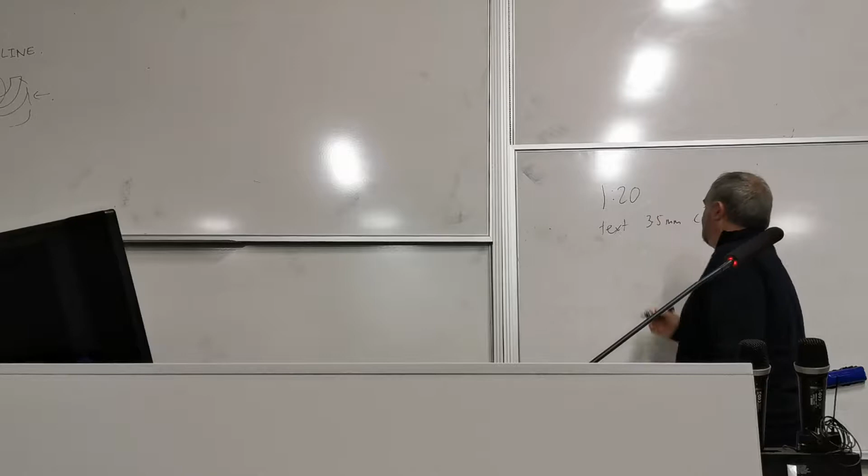The text is still going to be 3.5 millimetres in layout. Can anyone tell me what it's going to be in model? 1.75? No. Is it 0.35? 0.1? 0.07? No. 0.0035? There's actually half a mark coming up here if someone could get it, before the lecture's over would be nice. 0.17? Well done, mate, you've got yourself half a mark.

It's millimetre drawings from now on. Okay, so to do that, we go 3.5 times 20, which equals... did you say 7? 10? Sorry, I have to take that away from you. Which equals 70, alright? That's how simple it is with millimetre drawings.

Is it for both of the assignments? Just assignment 3? Yeah, so for assignment 3, it's millimetres.

So cast your mind back to either me or Ingrid: with millimetre drawings, everything's drawn in millimetres. So when its layout space is asked for 3.5 millimetres, and the scale is 20, that's what you draw it as. Okay?

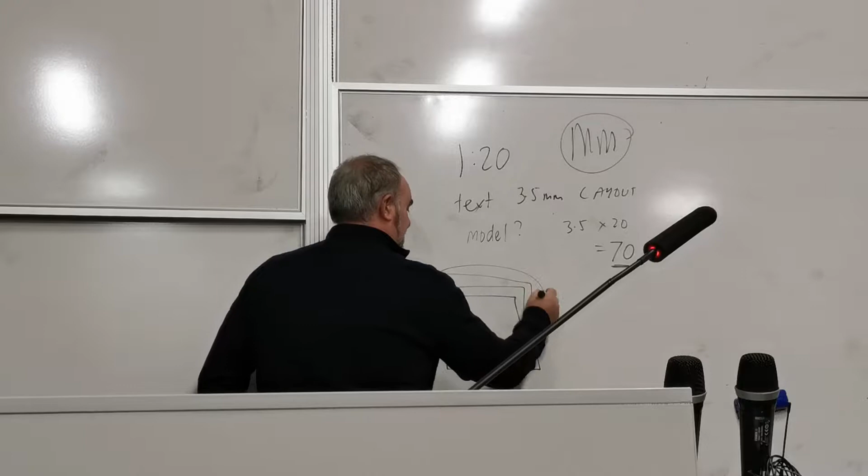They went, 'hey bro, what are we offset by?' And someone said, 'oh, it's 0.2, okay cool.' Then what about this side? 'Oh, that's 0.4, okay thanks.' And they joined up and found the butterfly wing, drew it in there, and thought, 'oh, that's going to be a pretty easy 7 marks from Roger.' No, it's going to be a very easy 1 mark from Roger.

Did you label the wings: toe of fill, top of cut? Did you put the batter symbols in the correct place? If you use batter symbols, do you still need to label it with words? No, that's fine. Did you label the cut area and the fill area?

Did you put the flags in for the A and B sections? Did you not put the flags through the platform, like Ingrid showed you not to do through anything? Did you put the line of equal cut and fill and label it, and put it in a line type that was different to all your other ones? Did you take your survey pegs off and your survey data off the proposed plan? And did you put a line on the proposed plan that was a lot thicker than the normal lines?

That is how you maximise your mark in my class, okay?

So taking that forward into assignment 3, the more students that ask questions, the more they get answers, the more they get feedback that ends up in real marks, okay? With assignment 3 there's quite a few bonuses to be had. And sorry about taking that bonus away, it's just that you and I both are no good at maths, so, you know...

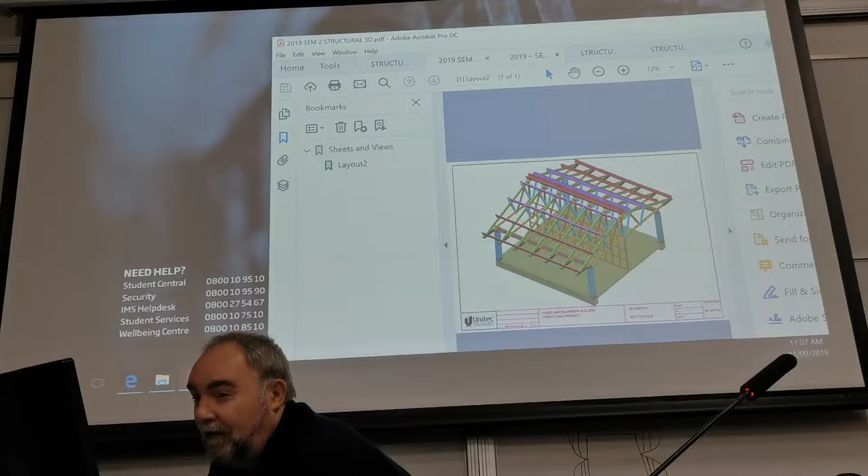Okay, what if I was to do this? Is that coming through at all? Oh, yeah, yeah. Alpha Mark. To me? Yeah. The problem I've got is that's off my screen, and I can't see it on here now. Oh, so I know.

Display settings to detect. Extend these. Right, I can now. So that's what you guys are seeing? Everything's going.

Okay, it's going to be an interesting session, I've got an idea. Luckily, I'm an engineer and know how to think laterally on things rather than, no, it didn't work, try again.

Is that coming onto the screen? No, no, yeah. It's not lucky. Show on only two, extend these displays, duplicate these displays, keep changes. Is that it? Yeah, yeah. Always do. It's crying a little bit.

Your task is using A1 ISO full bleed in tab 1 to produce a foundation slab reinforcing. So you're not having to initially draw the whole of the building up. All you'll be required to do is a drawing of the foundation slab. Now the foundation slab has got an elevation that looks like that, so in plan view it's going to look like that. Looking down on it, you're going to see those two corners with a dashed line.

Basic technical literacy, you would have learned that. I don't want to see this, I just want to see that. And I'm not going to give you 5 marks just by drawing a box with some dashed lines. So obviously you're going to have to put reinforcing in there and call it up.

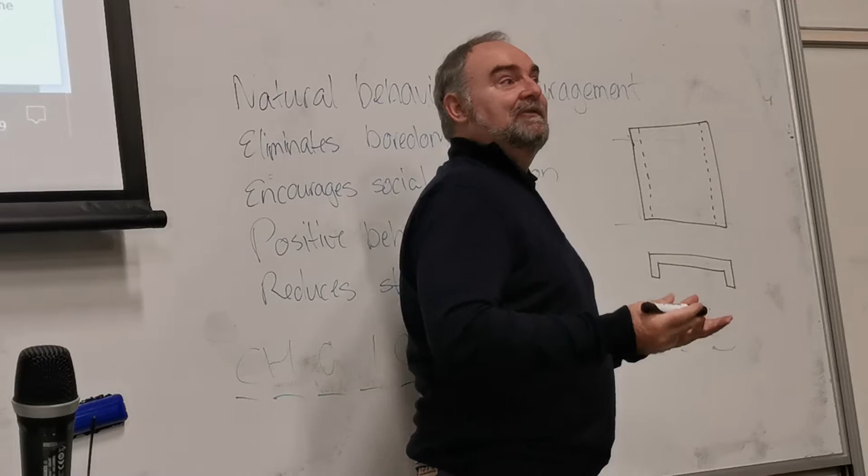The bad news is you'll be doing a reinforcing schedule, which is telling me exactly how long each bar is, how it's bent, what the dimensions, what the weight is. And if you get the schedule wrong, you'll get your numbers wrong on here, so you're duplicating your problems. If you get the schedule right, you'll get this part right too. So it's one or the other.

So this is one part of the assignment, the slab, and it's kind of all you really need to draw in terms of lines and drawings. The next two parts are your bar schedule or reinforcing schedule and your layout tab. Tab two will have a table of concrete quantities, materials, and that sort of thing as well, which isn't too bad, but that's another 5 marks as well.

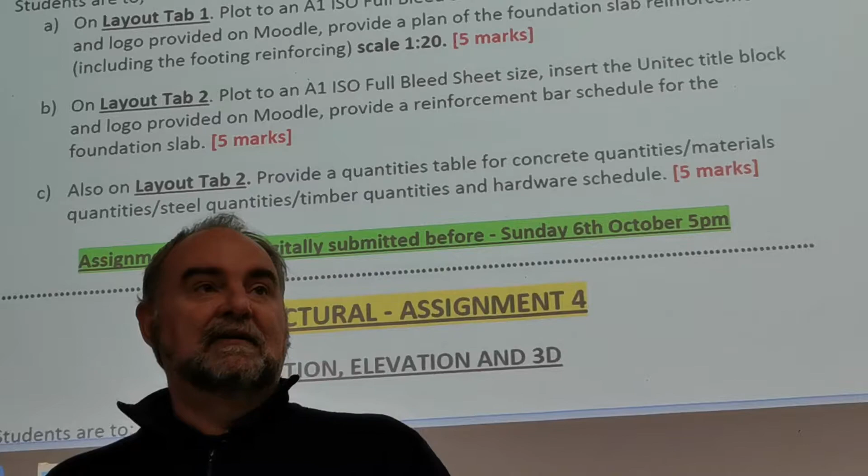In assignment 4, which is the second hand in, you can be beavering away drawing this at the same time. Students often ask me, do you want to see this elevation view when I'm drawing my slab? And the answer is no, take it right out of the viewport.

Do you want me to draw it? And I say to students, it's a very good idea to draw it because you're going to have to do it for assignment 4 anyway. So if you draw it down here away from the slab, you won't see it in the viewport, so I'll be happy. And you can start drawing your building up for assignment 4, and then when assignment 4 comes, you've already started drawing some of the drawing up. So you'll have the reinforcing bars and elevation view.

I'll be wondering exactly what I'm talking about. I am wondering myself, so I'll show you. So they're both related to each other, assignment 3 and 4? They are related, yes, that's exactly the way that I would say myself.

So I learned yesterday that if you click on that, you can maximise it, and I'm not sure how good that's come through, but I'll zoom in a little bit more so you can see. The quality is not too bad, you can read it, it's just a little bit hard on the big screen. Let me explain it.

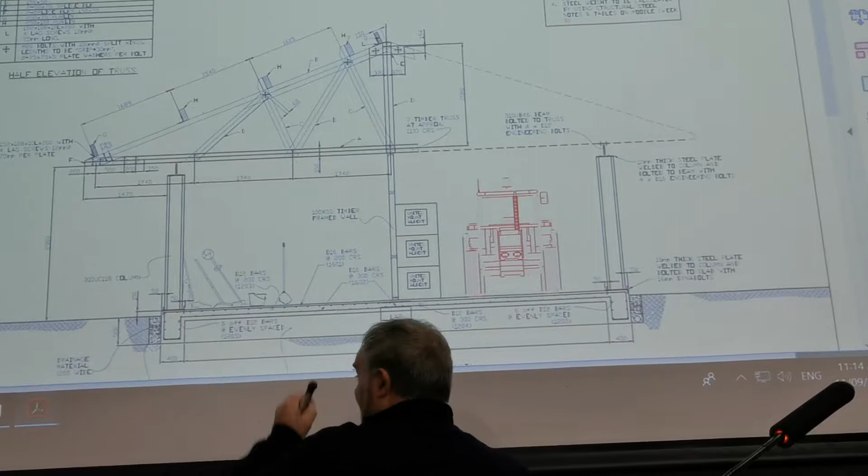You have a floor slab, much like I've drawn that one there. You've got a bit like your assignment in technical literacy, you've got some drainage here, and you've got a drain, an overflow drain, and some reinforcing bars in here. On that we then have some plates, then a column, more plates, a beam, and on top of that beam we place our trusses. The trusses are timber trusses, and there's 7 of them going basically into the wall.

In order to work out how you're going to represent these bars in plan view, it's not a bad idea to draw this up first. A lot of students do that. Last semester you did some reinforcing for Ingrid, and she told you and me that there is a minimum radius for bending a bar of reinforcing.

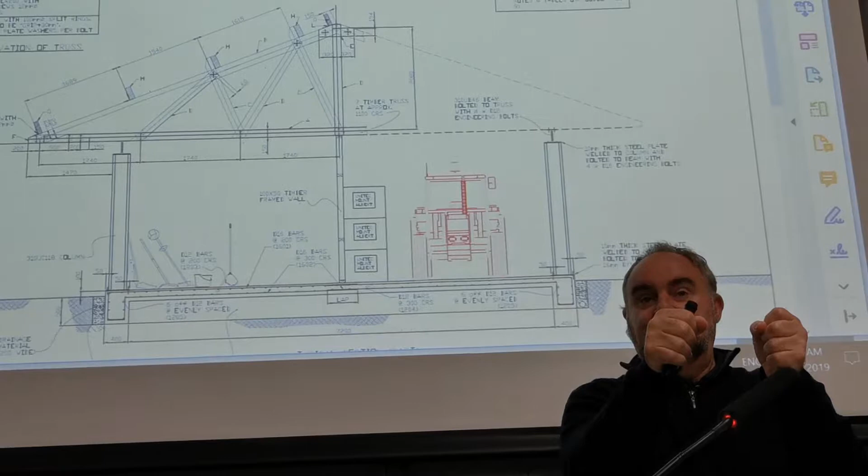And that minimum radius was - anyone remember what the formula was? You're close, but that's just a number. What if my reinforcing bar was 1 kilometre long? Would it still be 45? It's a formula. And the formula for finding the centre point of any bar is 2.5 times the diameter of that bar.

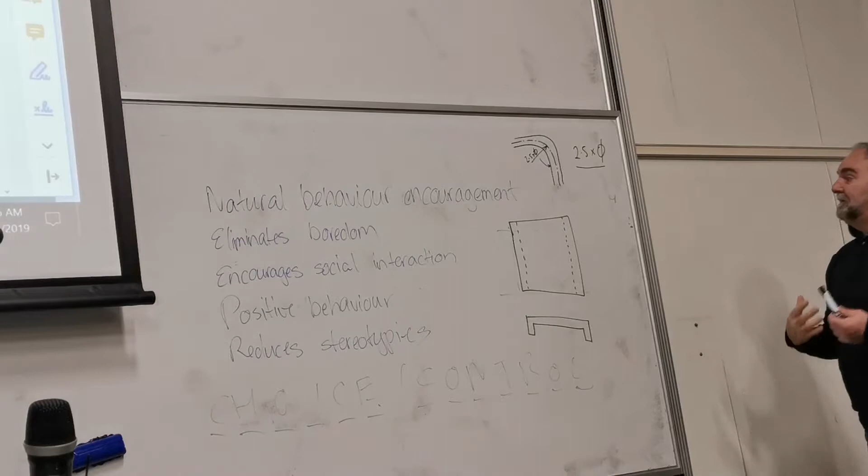So that radius there is equal to 2.5 times the diameter of this bar here. So in technical literacy we used a 16mm bar multiplied by 2.5 equals 40 millimetres to the centre of the bar. And remember, we did a P-line and then we filleted it with a fillet of 40 mils.

Similar things apply here. I expect you to draw that up with the right line thickness. The donuts will be the right size as well. Some of these bars are different sizes, we'll talk about that later. So if you draw this up first, I don't want to see it for assignment 3, but you can use it because for assignment 4 you're basically drawing that up. So at least you would have done the bottom part anyway, okay?

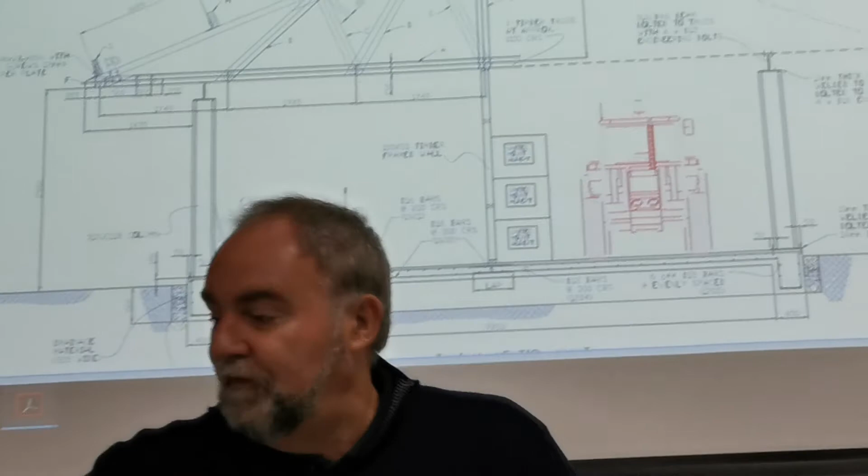Back to assignment 4. You're expected to draw up the 2 elevational views. That was one of them that you just saw. The other one looks very much like this - except I haven't given you anything there. You're going to have to draw that up yourself without my help. Whereas the other one, I've given you a little bit of help.

Now I don't want to see a dash line here, but for those that have noticed, AutoCAD's got a command called mirror, so you could probably get away with just drawing half of it up anyway and going to the other side. In fact, you could do half the slab down the bottom as well, if you wanted, if you were clever enough.

You don't have to draw the tractor, okay? The tractor is not part of it, that's just me being smart. You do not have to draw a tractor. And if you come from a farm somewhere in New Zealand, you are not going to get any extra marks for finding a 3D tractor and putting it inside the shed.

Do you trace that or just make it up out of your head? I'm not going to do it, I'm not going to do it. I just want to know - about 4 years ago, I found that online and I downloaded it. You don't need to know this, but it's made up of about 1 million different little dots, which is a very bad drawing. But it worked nicely for my assignment, so I threw it in.

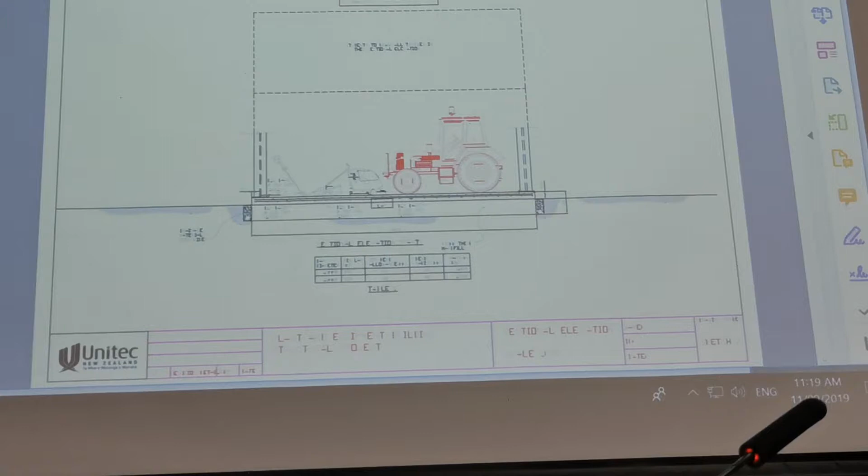All right, I've also got a Russian jet that I'm selling. If you want that online, it's stupid, and a monkey as well. I have actually got that, I'll bring them one. You don't have to show the equipment here either guys, it's just me trying to pad out the assignment, make it look like I do some work at home.

But the good thing about doing it this way around is it does show you the sideways view and the front view, right? So it gives you an idea that we are looking that way and looking that way. So when it comes to the assignment and the 3D aspect - I think that's the 3D. No, that's the reinforcing schedule. Try that one. Yep.

You'll see how things fit together, and you can see how these members go, one on the front and one on the back, etc., all the way along. Now, in 3D, what I'll do for you in week 10 is we'll draw up the slab, and I'll allow you to film it while I'm doing it. We'll do the plate, we'll do the column, we'll do the beam, I'll flip it round and put it on top.

I'll show you a couple of tricks because I don't like doing things more than I have to. I'll do one of these, go copy, copy, copy, do one beam, and flick it on the other side.

If we've got time, I'll show you the way I'd draw the truss up. It looks complicated, but you have to draw that anyway for assignment 4. You go around it in the P line and extrude the P line. If it's behind, extrude it that way; if it's in front, extrude it that way. Then you basically stand it up, put it on top, and copy it 7 times.

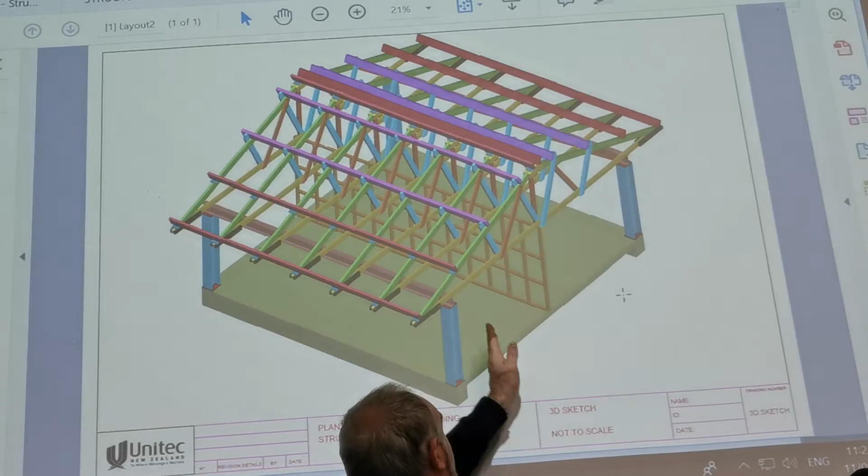The purlins are the same. You'll have to draw that little bit of the end of the purlin, and you'll know how much to extrude it, the length. You just extrude it once and copy, copy, copy, copy it into the correct position, so when you stand it up, the purlin will be stood up at the same time. It's pretty cool, I'll show you all that.

Because I've shown you all that, I'll give you 3 marks out of 5 for drawing it. The other 2 marks, you'll get a choice. The type of things I'll be asking you to do is draw the welds in, draw the bolts in, draw the angles in, draw the holes or the bolts and the angles.

This framing is part of the extra bit. If you want to go further, also external sheathing and roofing, and if you're really after an extra bonus mark, you'll have to get your civil contours and put them onto the drawing to show me the civil design around it—the bank and batter slopes and all that sort of thing, in 3D.

I'm very aware that a lot of you are going to have a materials test at some stage, along with other tests and assignments to get in, and an exam at this time of year as well. So my warning is to try and just stick to the 5 marks. The bonus 1 mark will take you a lot of time to get to, but it's there if you want it.

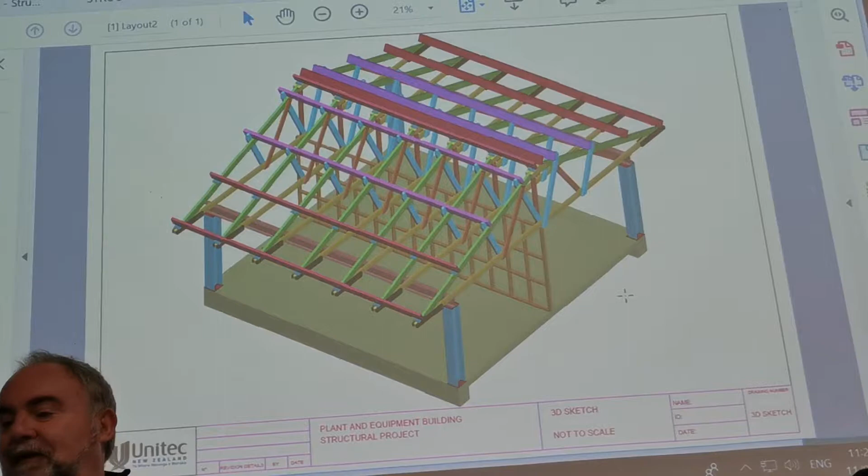So the assignment dates are set out here. Believe me, they're a lot softer than the degree. The degree's first hand-in for exactly the same project is midway through, end of this month for the first one, so the 20-something, and early to mid-October for the second one. They're also in the process of writing a 1,500-word design report at the moment. So maybe it was a good idea to tick the box that said diploma when you were doing your studies here.

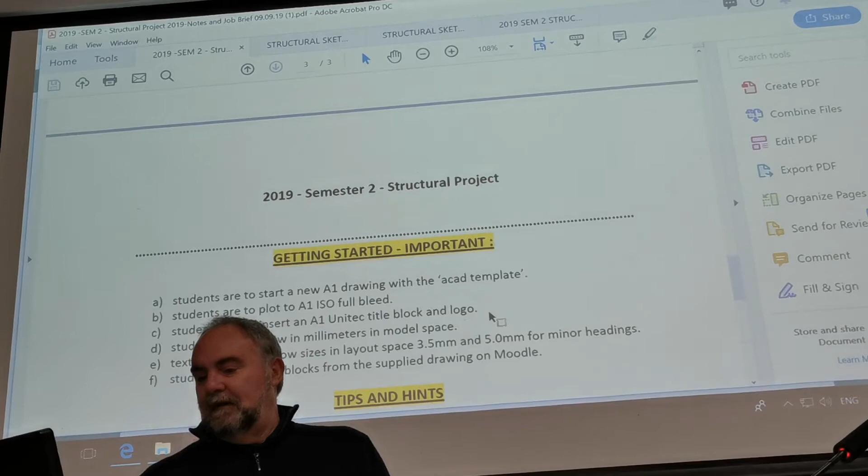So those are the dates, that's what we're heading towards, and there are a few tips there as well. If you want to get started, the best thing is to start setting up your title blocks. There's one that I've put into that set there as well, so you could start your title block and start drawing up this.

More importantly, you should start on the reinforcing schedule, which is why today's lab is really important to attend, and also Thursday's lab, because I'll be going over that side of things.

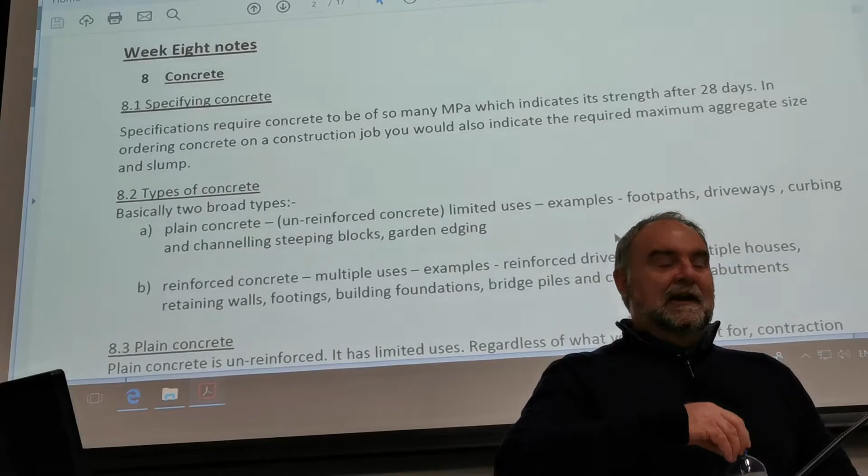So there is some overlap with other subjects. Now, a lot of you, not everybody, are what we call vanilla students here at Unitec, just going through doing exactly the chosen subjects each semester. Some of you fail things, some of you do five, some of you are here for 50,000 years. You're all doing different things, right? You think I'm a dinosaur.

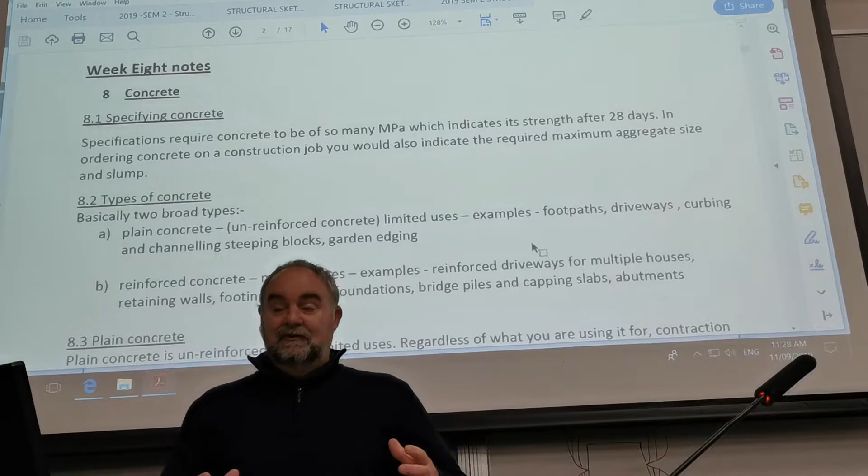You're all doing different things here at Unitec. So you'll find with my notes, like all the others, there's a little bit of overlap, particularly with materials, because you do concrete, steel and timber. But if you look at the materials notes, you'll notice Ingrid's notes are very intense, there's a lot to them. Good tip: don't miss her revision classes, because she tends to condense it down to a lot more of what you should be studying compared with all the notes. I'm not saying it's the answer to everything, but that's a good tip. Previously Roger Glanville, who taught before her, used to do the same thing.

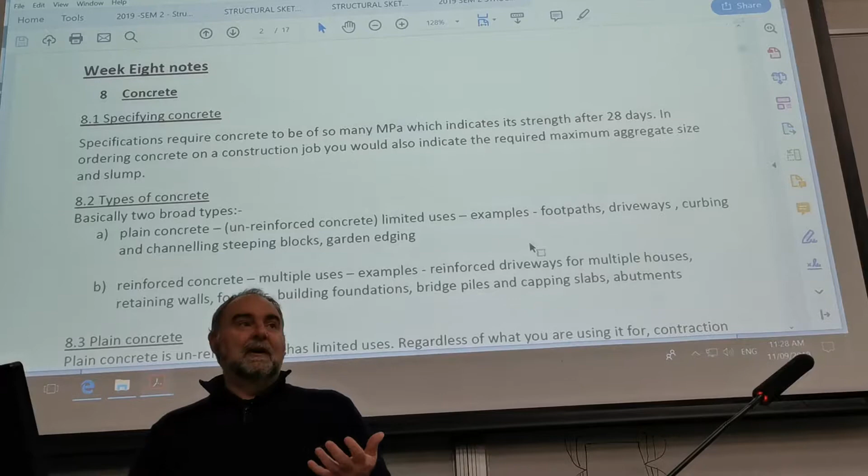As far as my notes go, I tend to concentrate more on explaining what something is and what I'd like to see on the drawings. For example, Ingrid might go into how concrete is manufactured, or how steel is manufactured, or the tanalization process of timber, going through the different stages, whereas I tend to say, okay, there's these types of timbers, you've got to choose one and put it on the drawings, and this is how you should write it. So it's a little bit different. You may not see that subtle difference, but I do like to give you theory that I can test you on as well.

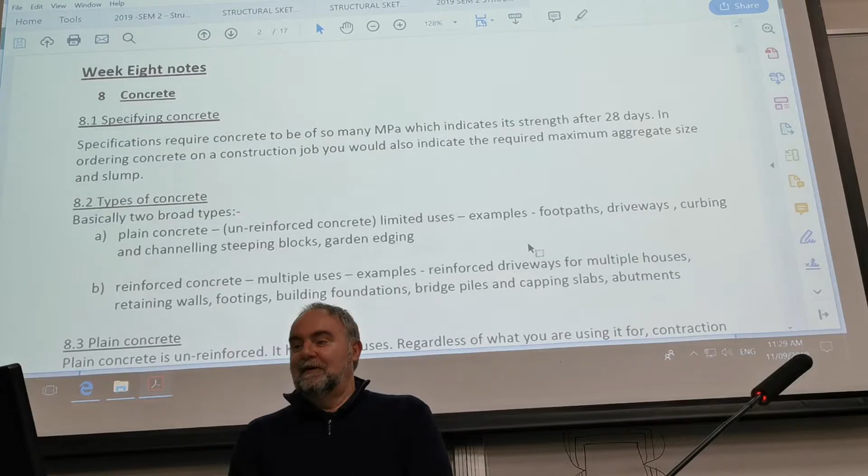With concrete, the MPa value is a pretty important factor in terms of the strength of the concrete after 28 days. What's not written in my notes is that that's one of the questions. Also not written: 20 MPa concrete is okay for an ordinary foundation slab for a house or something like that. But for this building, as you saw, and as Mr. Mitchell picked up, there's a tractor in this building, and that's fairly heavy, so it would be a good idea to put a reasonably good grade of concrete in there. So let's call it 25 MPa concrete, and let's make that one of our notes. It's not uncommon to say the concrete should be 25 MPa after 28 days as a standard structural note on a drawing.

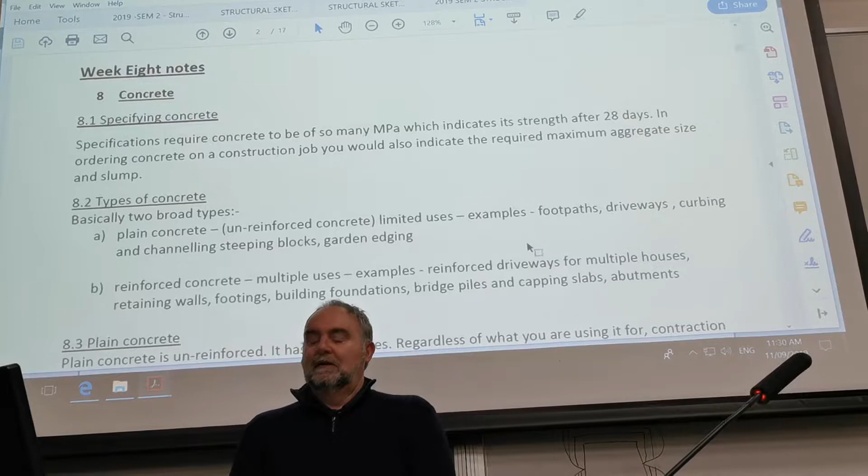By the way, when I say something and it doesn't appear on your drawing, and you start crying because you didn't get half a mark for your notes section - there's two types of concrete. There's plain concrete, which we are not using, but that can be found all over the place. It can be found on garden edgings, channeling, driveways, footpaths, curbs of roads. Basically unreinforced, so it's not going to last forever, but there's good reasons for that.

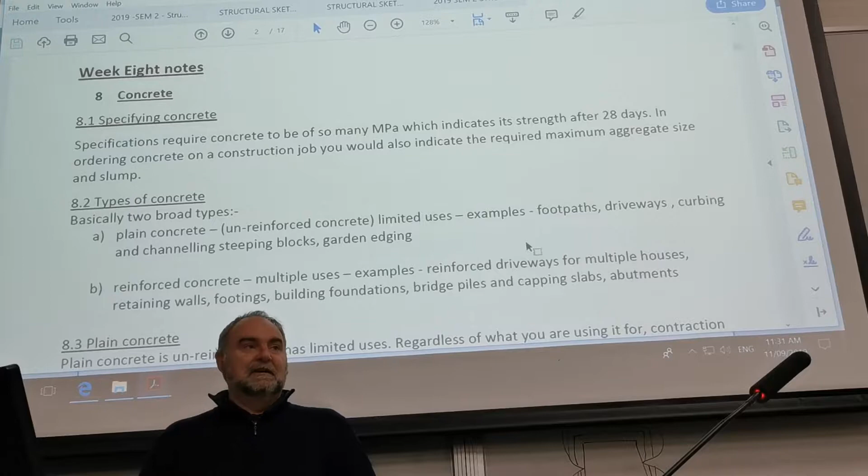Roads change in width from time to time, footpaths change, councils go down whole roads and redo the gutters, or they go through patching stuff. Dad decides to do a concrete drive, 10 years later he's sick of it and wants to do paving stones or put grass there. It's not a long-term use, but it could be 10 to 15 years before you start needing to think about replacing it.

Reinforced concrete, on the other hand, you would expect to last quite a number of years. We put reinforcing into concrete in New Zealand terms to strengthen it and to protect it against movement, particularly earthquake movements.

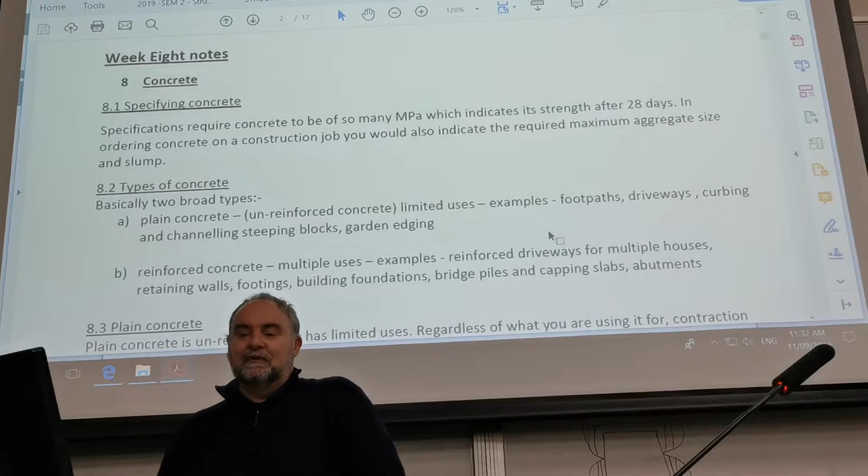And that's why an engineering certificate, diploma or degree in New Zealand is quite special, because most of the other countries that suffer pretty severe earthquakes are in third world areas where they don't actually reinforce concrete where they should, but they don't have these very strict building regulations that we have in our country. So, for example, if you went to work somewhere like the outback in Australia where they have virtually no earthquakes, to get a New Zealand engineer there that has done a New Zealand qualification is a little bit over the top in some ways. Same with third world countries too.

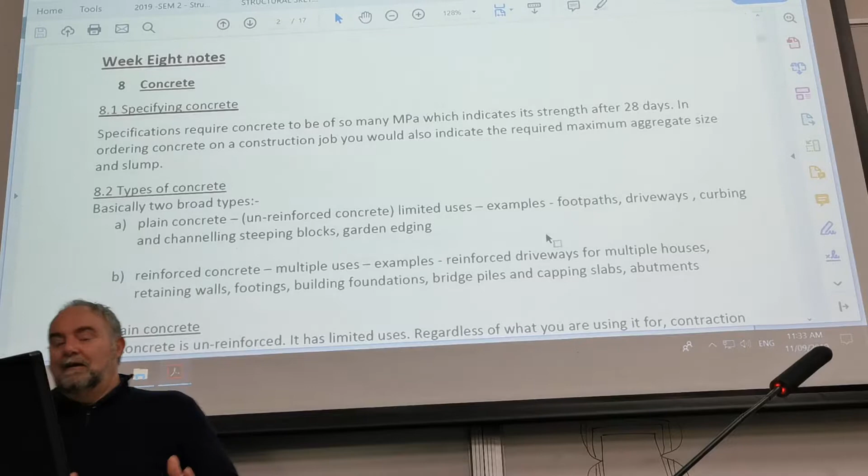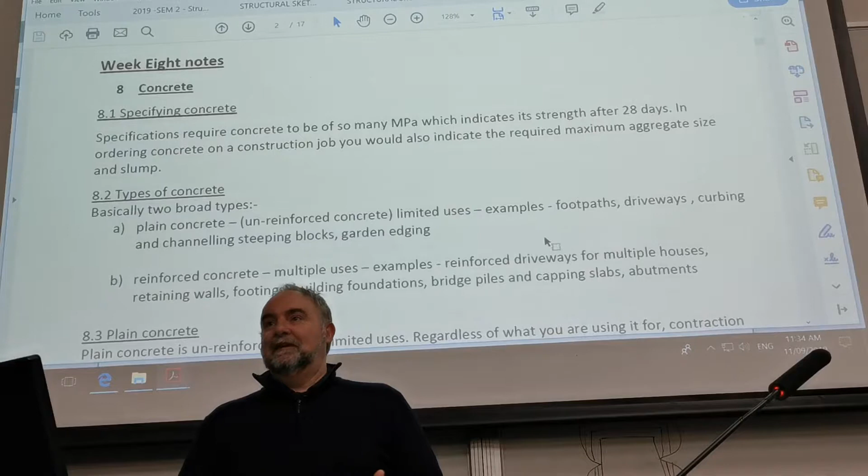So what you find in third world countries, and it's quite sad, is the contractor turns up, puts all the reinforcing down, digs the hole ready for concrete, the inspector comes and ticks the box, drives off, and then the concrete truck comes around the corner, they pull the reinforcing back out, pour the concrete in, and who's going to know anyway? Then they move it all to the next job. It's not uncommon, it happens all the time. There's a saying in New Zealand that it's all very well until someone stabs you with a blunt stick in the eye. Well, what happens when an earthquake happens? Thousands of people die because nothing's reinforced. It's just concrete or clay, and once it starts moving, it just turns to gravel.

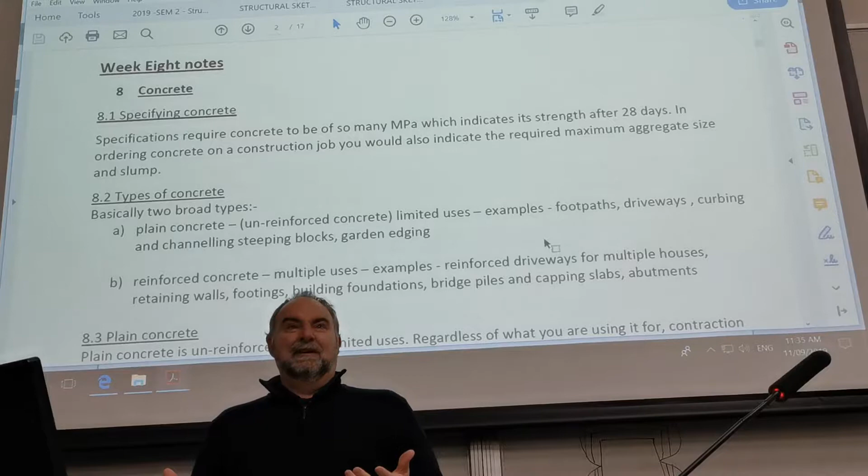So one of your first jobs as engineers, you might think you've got a cushy job, like at Beca's or some office, where you're just keeping warm, watering pot plants, and on a computer all day. The ideal job. Then the boss comes up and asks what you've got on your plate this afternoon. You say nothing much, got another job for me? Yep, go to such and such a site and count the reinforcing bars. And that's what happened to me, first day on the job. I'm thinking, isn't anyone else capable of counting reinforcing bars?

It's not just counting it, it's measuring the distances between them and how many there are. Now, the guys who do steelwork on site are usually about twice my size, and they don't really like being told what to do. I guarantee most of them bend the bars by hand rather than use a machine, but I was a young lad, about 18 or 19, and I had to tell this big dude he hadn't put enough reinforcing bars in. His problem was he needed me to sign the piece of paper to take back to my boss, who signed the drawings off. I stood there and did it, shaking a bit, but we got through it. Why? Because a certified structural engineer designed that to those spacings, that size bar, that many along there, and that's what holds the building or structure up.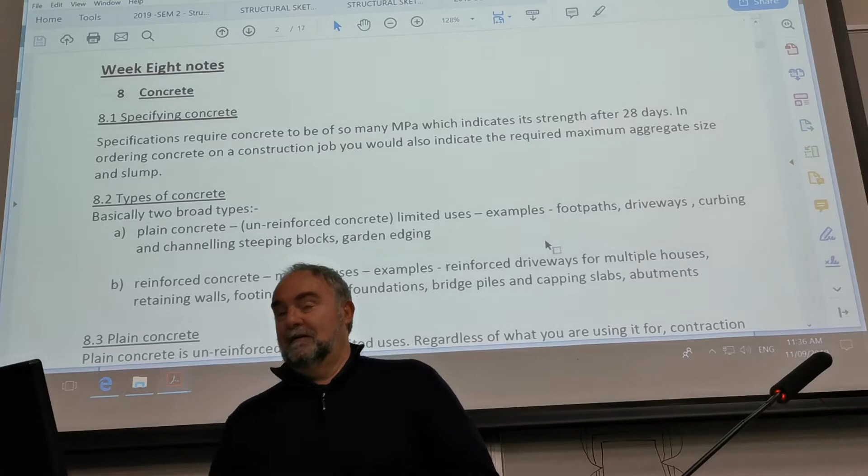If you go on site and just say 'oh yeah, that looks right, that's fine,' you're responsible. The CCTV building in Christchurch - the guy on site had faked his engineering degree, true story - and the guy who was supposed to sign it off was too lazy to go check it himself, so he got that guy to do all the site work. I'm not quite sure who you blame for that, but in the end it was not properly checked and not properly signed off.

And look what happened. On the serious side of things, someone told me the other day that two-thirds of the deaths in Christchurch were in that building. So technically speaking, most of the rest of the city stood up pretty well, apart from some brick facades on the fronts of buildings.

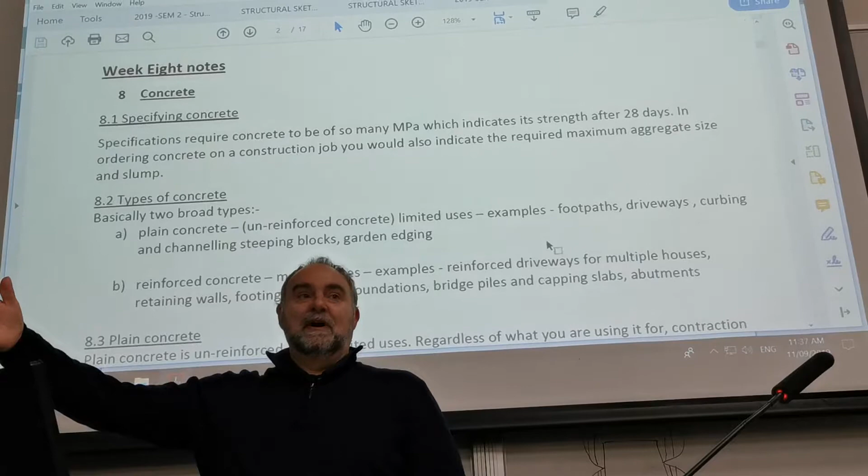That's a very important job, and it's something you'll do even if you're not a site engineer. If you're a site engineer, you're doing it every day. If the guy doing the reinforcing gives you trouble, you just tell him to leave site if he's not going to do his job properly. But if you're coming from an office like me, where we used to wear ties and looked like suits arriving on the job, it's just a very important part of the job, counting the reinforcing.

The reinforcing rods, if you haven't done reinforcing yet, Ingrid will bring some into the class. I've got some in my office as well to give you an example. These ribs help bind the concrete, help make it stick, stop any movement, and help bind the concrete to the steel to do the job they're supposed to do.

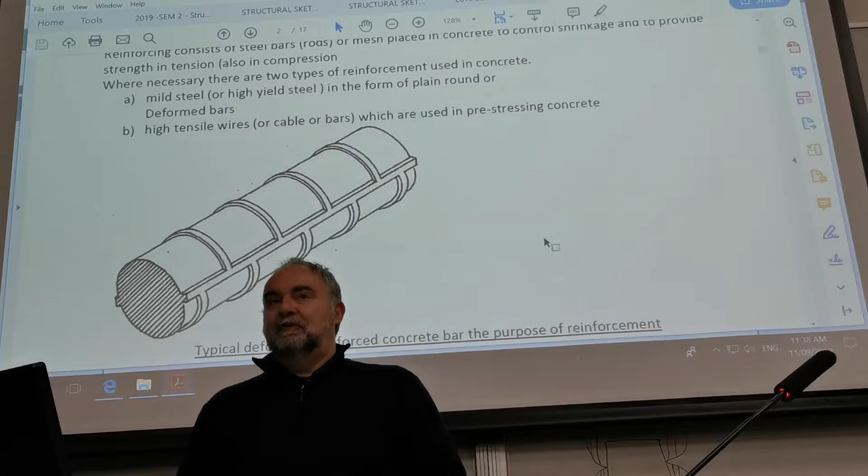There's two types of reinforcing. There's the reinforcing where they put tension on the bars, pour the concrete around it, then snip the end of it - that's pre-stressed concrete, which you'll see on things like beams and maybe walls and floors of car parks. Then there's what we call in situ concrete, which is poured on site - I think it's Latin, in situ, not 100% sure. That's the next note I'd put on my drawing: on this job, the concrete will be in situ concrete.

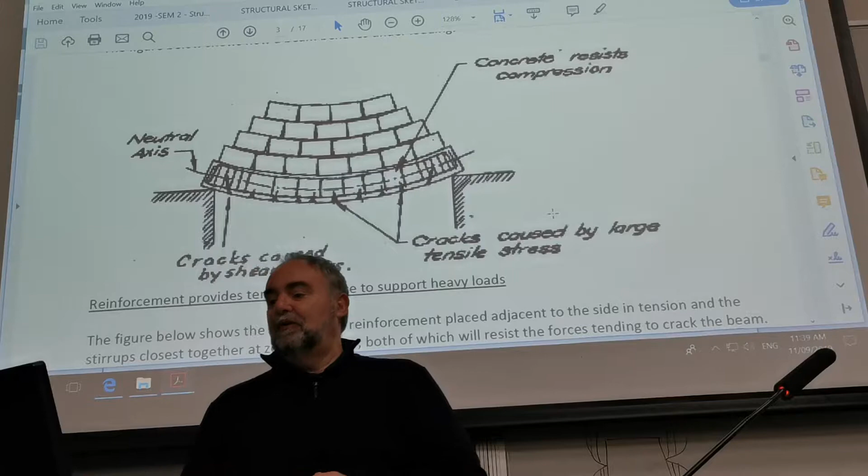There's a little diagram showing that we put reinforcing in concrete or brick to stop the tension, to protect it against shear stress, and to stop any cracks caused by tensile stress, which is concrete under tension.

There's an example of caging, which I was talking about a few minutes ago - very common to see that sort of thing on site. Usually we use plastic spacers now, so we get those spacings exactly right all the way along. If you're on site checking it, you'd need to do that with either a ruler or some sort of mark to what you're expecting the spacings to be. It's all very well saying there's 30 bars, but if they haven't been nicely spaced, there'll be big gaps, which is no good as far as the structure holding out goes.

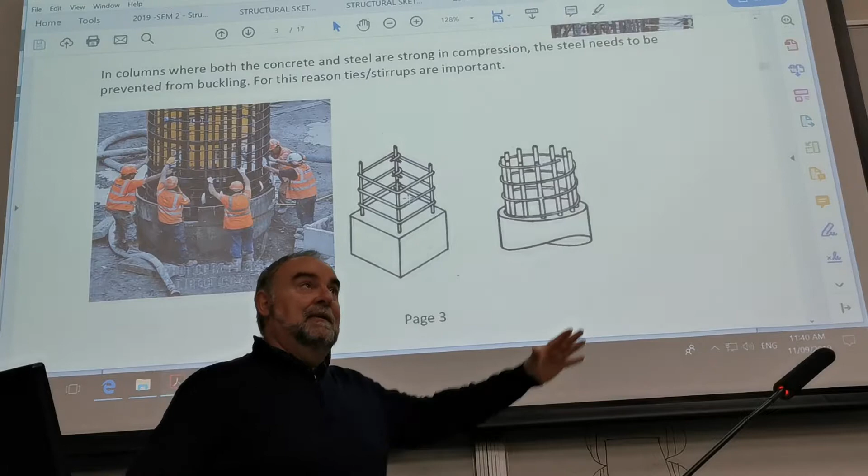This is a photo taken about 4 or 5 years ago, from the Herald, of the guys starting the big piles over at Waterview. You know how you come out of the tunnel and go way up in the air, big piles holding that up - it was pretty cool. They allowed Unitec students to go on site and have a look at everything close up.

They would do basically this circular shape with the ties holding the main reinforcing up. They'd have a situation where the reinforcing would stick out of the concrete like that, then they'd put the next piece of reinforcing in and tie it to that, then move that big circular piece of formwork up to do the next pour, and pour that concrete, and so on - doing another lap at the bar each time.

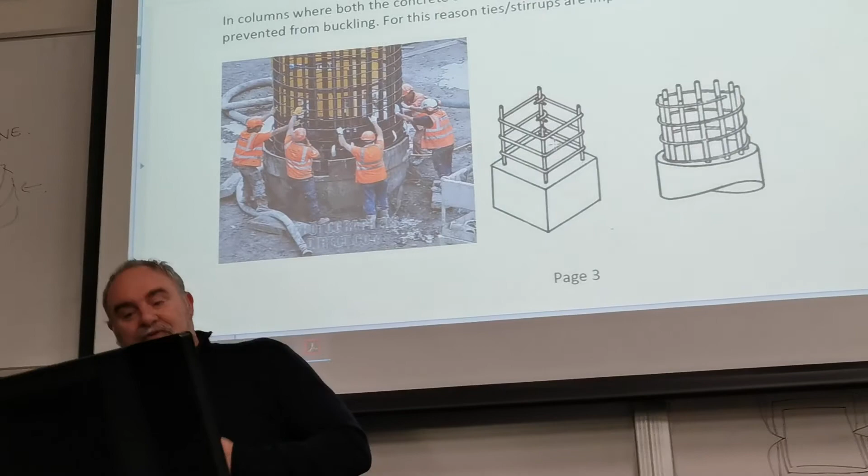So a bar lap became very important in that job because it helps hold each piece of reinforcing in place. We have a calculation for bar lap which is also in these notes, and you should include it in your notes somewhere. Generally speaking, the lap is 32 times the diameter of the bar, unless a table has been provided. On your assignment for this job, 12mm bars have a lap of 390, and 16mm bars have a lap of 520.

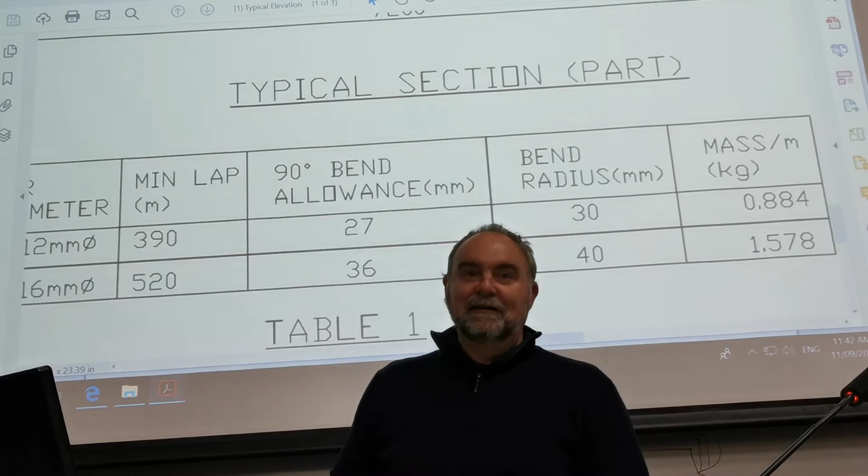A lap here is not the type of lap you're thinking - it's when you overlap a bar. With a window, we have trimmer bars which go around a concrete window, and this is classed as the lap. With a door, it's exactly the same, but we don't have the bottom bit. With reinforcing, if we don't have a long enough bar, we have to lap it like that to continue it on. Your assignment's got a lap on it, and there's a minimum lap required - with the 16mm bars, it's 520 mils, and with the 12mm bars, it's 390 mils.

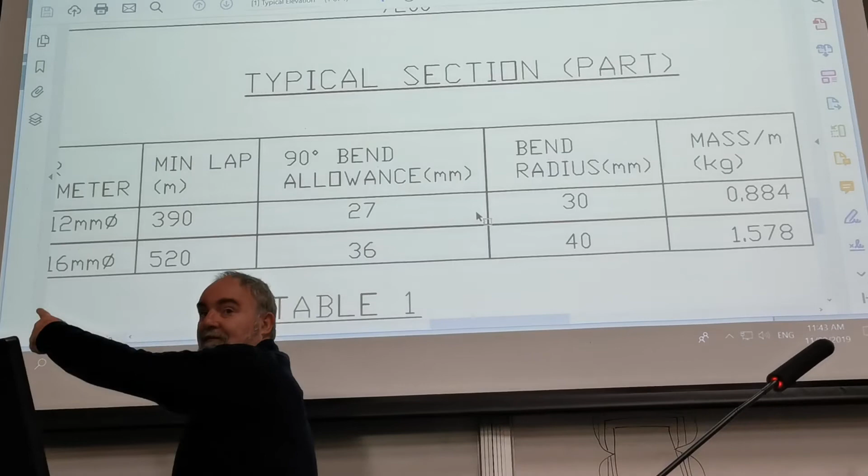That's how we could actually make that slab continuous all the way down the road, as long as we kept lapping the bars. In the old days it was quite a hard job because you had to put wire around them, but now they have plastic ties you can buy anywhere. One tie should be on the bottom, the next one on the top - there's no specific rule as long as they're actually lapped. But there is a rule to make sure you don't go outside of the cover - I'll talk about that in a minute.

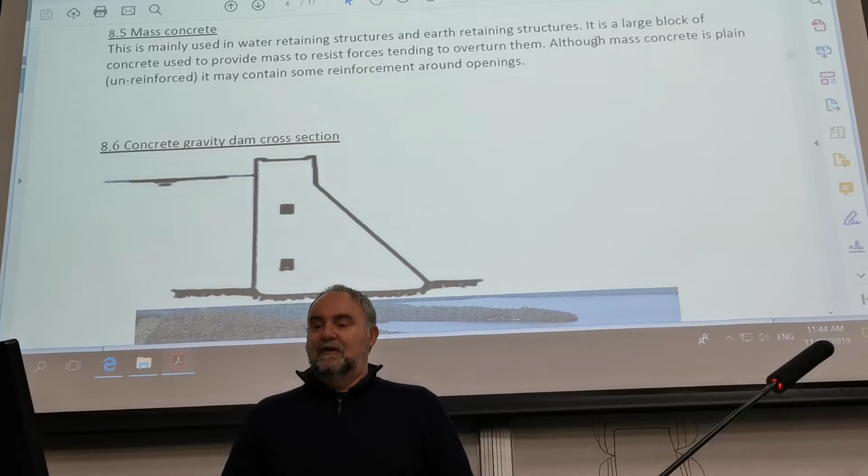Some examples of mass concrete are where most of the job is concrete, like a concrete gravity dam. I worked in Central Otago on the Clyde Dam, which at the time was the second biggest in New Zealand, I think it still is. Definitely the biggest concrete gravity dam anyway.

Benmore is an earth gravity dam. Those black things you see there are what we call galleries, and you can walk through there and do various surveys to work out if the dam's moving at all. It pretty much relies on the mass of the concrete holding the water back, which is a bit scary really if you live downstream from that.

It's also scary in that they were halfway through the build of that dam when they found out it was on a fault line, which was interesting as well. The Germans were building it, I worked for a German company, and they panicked a little bit, to say the least.

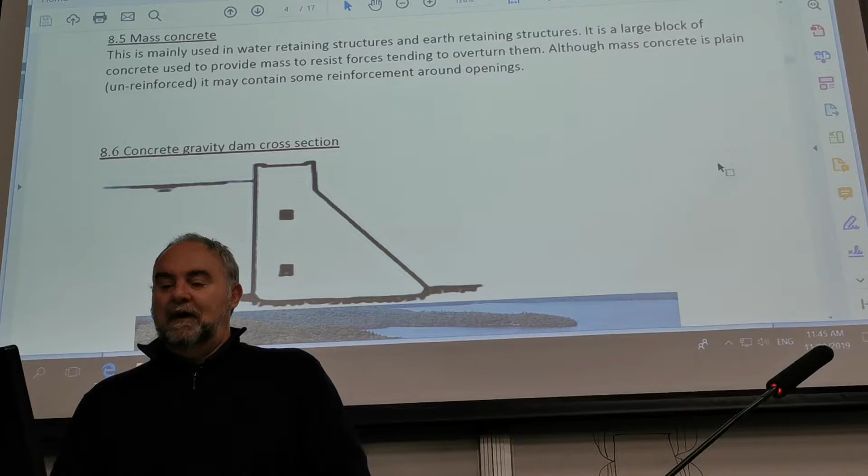So they started drilling into the rock, and the rock in that part of the world was called schist, which is German for something else, which is what they called the rock because it kept crumbling away. Which was interesting hearing their German, they always had the word schist in it. I was wondering whether they were swearing or talking about the rock.

So that's a concrete gravity dam, and here's another use for plain concrete, by the likes of retaining walls for gardens and that sort of thing.

In situ, there we are - concrete, which is in its plastic form, is placed into position in the structure, is termed in situ concrete. So that's a long explanation.

Precast concrete comes in many ways. This is the ones where you stretch the reinforcing and then you pour it around it in a frame, and then you take it to site.

I know that when they do the motorway bridges, they bring everything to site at night time, and they stretch these precast slabs across the motorway. It would be impossible almost to build them in situ, with all the traffic going underneath and all the rest. But this way they can put 4 or 5 beams across in one evening. So one minute there's nothing, next minute there's a bridge across the motorway.

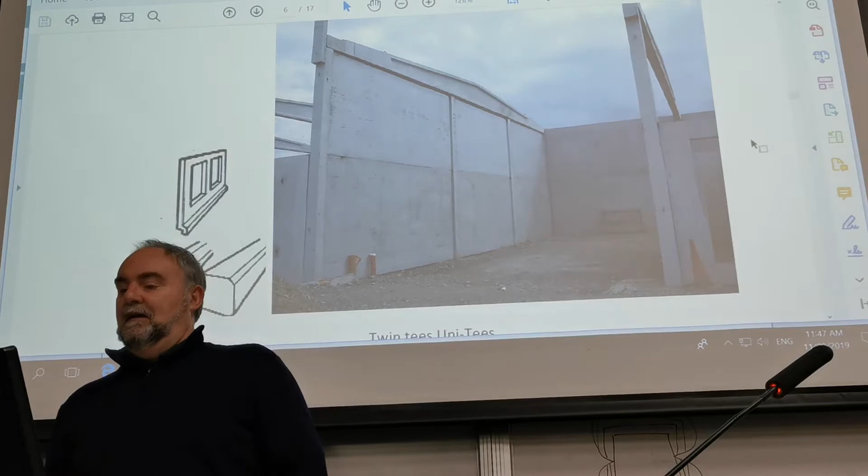So very good for fast construction jobs, good for fast erection of car parks. I don't know what experience you've had of driving around the city - one minute there's a vacant lot, next minute, boop, boop, boop, boop, there's a 4-storey car park up. They tend to do that with tilt slabs, and all of that is pre-stressed concrete.

The old double T - I worked on Mount Albert Pak'nSave, just down the road from here for those that aren't familiar with this area. We were excavating and came across lava flow from Mount Albert from a few years back. Once you hit lava, you've got to dynamite it, so you can no longer use the digger, and that's a lot of extra money.

We had a very clever engineer in our office, and he said, well, what's the minimum height for car parks? And we told him. We went to council, they said whatever the twin T's or the uni T's are sticking down is the height we measure to - I suppose technically a car or a person's head could bang it. So my boss went away and designed some special twin T's that meant the height of that beam was a lot smaller. We didn't have to dynamite.

They saved not millions, but a lot of money on the excavation works in terms of what we had to take out of the rock. Interesting job, that one. You guys doing structures, one or two of you, they talk about the deflection of a beam - the Pak'nSave there, obviously all the stock in there is very, very heavy, so the beams had to be designed to take that.

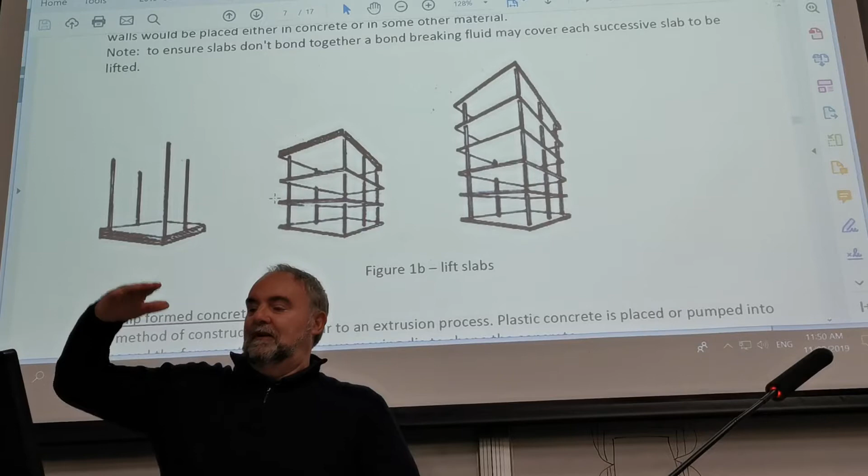That's just a little diagram on how we use lift slab concrete. We pour it and raise it in, as far as car parks go.

Steel grades. Well, here's one of my questions in the test. The most common grade is 300.

And the place that we get most of the New Zealand reinforcing from is a place called Pacific Steel. I think part of that is now taken over by Fletcher's, but it's down in Otahuhu, South Auckland. And because there's only the one place, all the steel comes out to New Zealand standards.

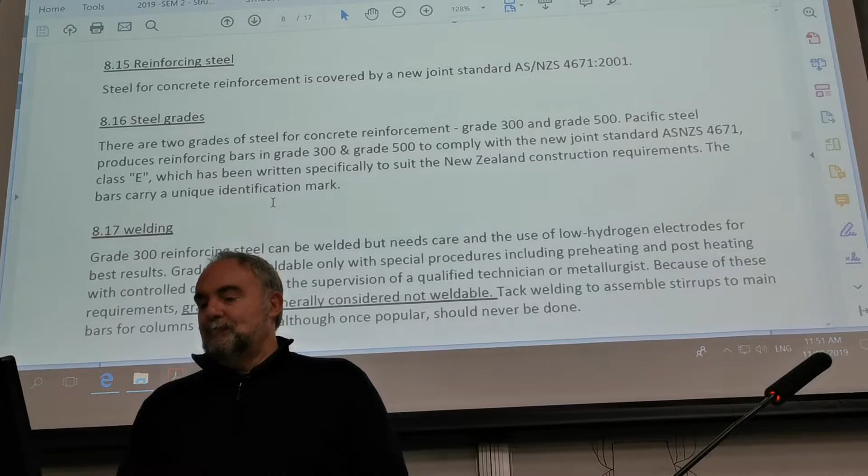They're always improving things, but generally in New Zealand we don't use welding as a way of joining the bars. You are asking what a lap is. The old-fashioned way is they used to just weld the end of the bars.

That's generally not acceptable in New Zealand. They tend to overlap them instead - call it lapping. They tie that tight with steel wire, or nowadays plastic.

So where the reinforcement's lapped, are they not actually connected to each other? They are, they're tied to each other. They're not tack welded or anything like that - generally speaking, no.

The other thing is that if this reinforcing had a bend in it, if you think about it, if that was one whole piece of reinforcing to put into a hole, it's rather awkward - you're coming in on an angle, it's not quite fitting at one end, very awkward to fit into different shapes. If you break it down with a lap in it, you can put one bar in, then put the other bar in, and then bring them to place. It's a lot easier for the guys on site to do it.

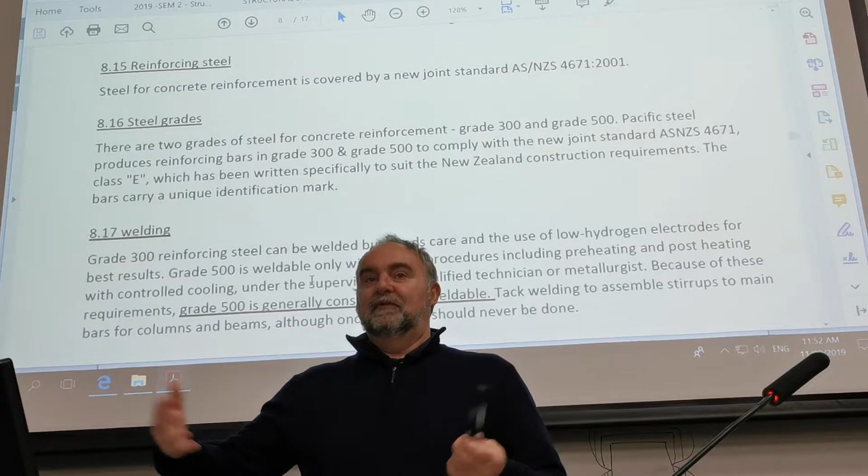And often what they do is look at your drawing and go, nah, that's not going to work, it's going to take us like 2 days to do it. So they ring up the engineer, who says, no, that's fine, put a lap in it, and then they can quickly put it all together.

Remember the bars go in the other direction as well, so there's quite a bit to the reinforcing side of it.

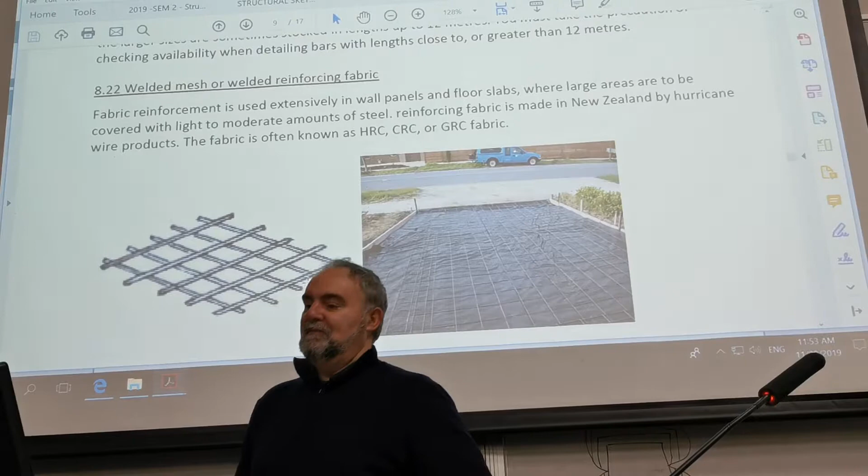There's a picture of a driveway for those that have never actually helped their fathers do a driveway in the past. I guess it's changing times - I don't know if that many fathers do that sort of work anymore now, but back in my time, my dad and I did a driveway.

We didn't even put reinforcing mesh in there because it cost too much, and we didn't even put polythene down either. We just whacked the concrete in there and that was it, and that was fine for Dad. About 10 years later we had to replace it all again. When you put the mesh in, it does tend to last more like 15 to 20 years.

It's pretty standard for guys that come to site now to do it that way. It was also a common thing for rugby clubs, soccer clubs, tennis clubs, whatever, to go and do somebody's driveway for them for a small amount donated to the club. But I guess a lot of that has changed as well.

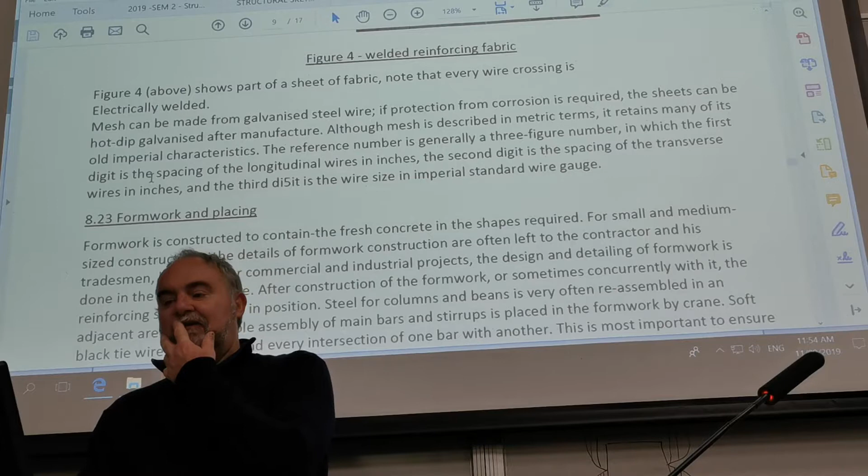There's different building codes these days, and only so many people are allowed to do certain jobs on houses and things. There was a time you could do your own electricity and plumbing and all that sort of thing, but most things now have to be signed off by someone, a registered person.

If you guys end up doing structural drafting, after so many years you can get certified as a structural draftsman, which means you could technically do your own house plans. I know architectural draftsmen - that's their big thing, to get certified so they can go out on their own and do people's basic house plans. Also, with companies, it makes you more employable because you're already certified, so they can leave you to do the structural drawings on your own.

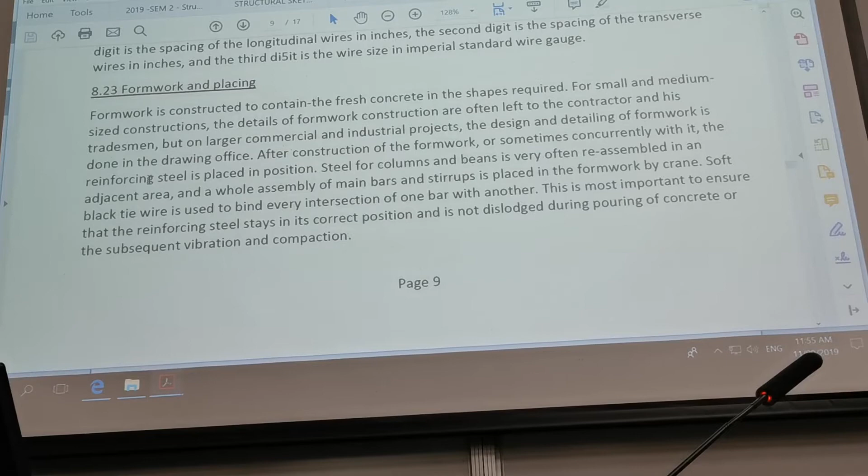Formwork and placing of formwork. Every year I do this diagram, and every year I put the question on this in the test. One or two of you already know this, so bear with me, but quite a few of the class won't. When we're pouring, for example, for a retaining wall, concrete around here, the concrete we draw like that, we have our ground, this, and we have some bracing, like the bracing you said, holding that up.

What we tend to call this is formwork, and this we tend to call false work. All of that, excluding the concrete, is called boxing. I'll put in here, not concrete.

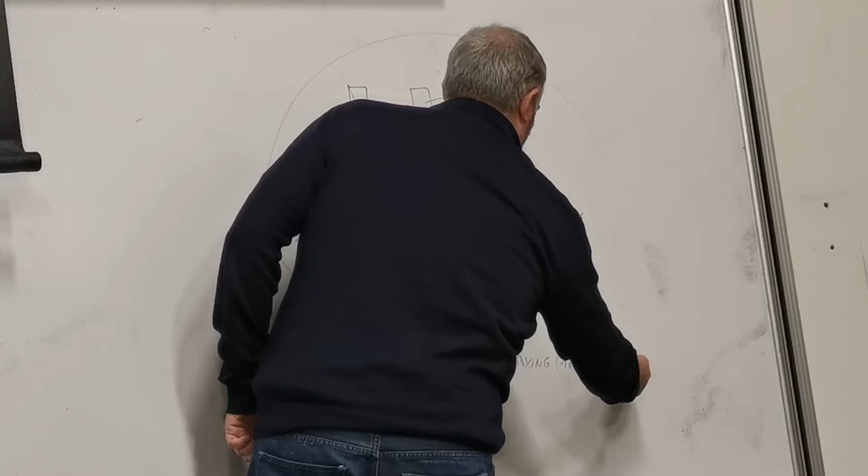So what you'll have to do as site engineers, and sometimes as office engineers, is you'll get asked to give a dollar number for how much the boxing is going to cost. A lot of it depends on what formwork you use. Sometimes they use metal formwork, meaning they pour the concrete, move it along, wash it down, and pour the next section, so you can reuse it. Obviously that costs more money, and it's specific to that job, so you won't be able to reuse it on another job.

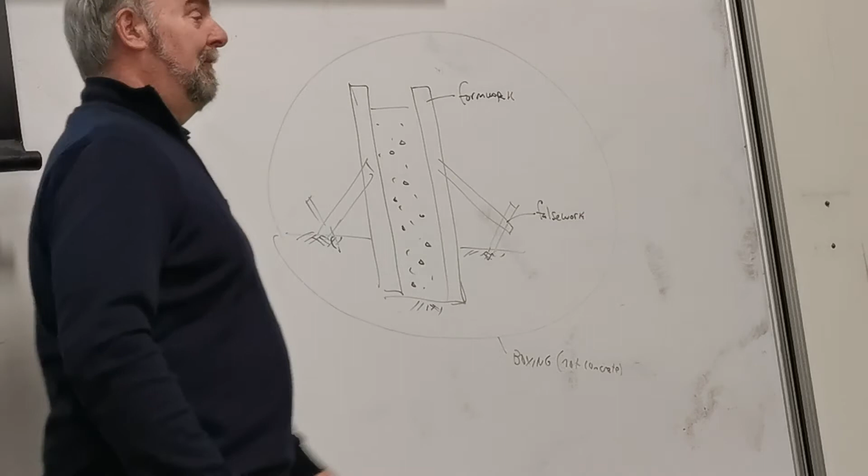What tends to happen more is they use cheap timber shutters as the formwork. This stuff tends to be throwaway - put a peg in the ground, brace it, just chuck it away afterwards. Sometimes you can reuse it further down the job. But they'll have a set rate for formwork and for false work, and that often needs to be included in your job. So one of the big questions I ask is, what is the difference between formwork and false work?

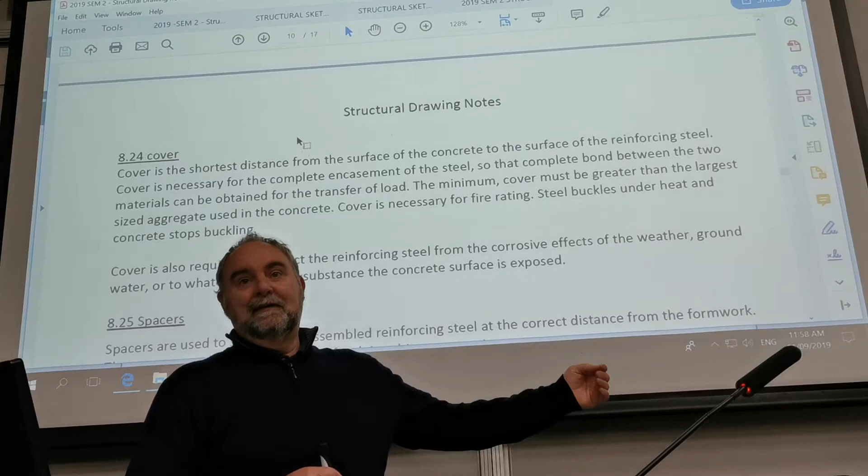So timber formwork is cheaper than steel? Yeah, well, think of the likes of importing something from, say, India, shipped over here with a pallet around it to protect it - very thin, cheap timber. You can pick that up for next to nothing, and it makes good formwork for something like a retaining wall. But if that was in your garden, it would look very rough.

How many times can we use timber formwork for? How many times can you reuse it? Not very much, because when you pull it off, sometimes it sticks, sometimes you get concrete all over it and can't wash it down, so it leaves that pattern on the next bit. But a steel one can be used many times - they just wash it down and move it along. It's weird, how come that's cheaper? Well, the steel is more expensive, but you can keep reusing it - except you can only use it on that job, unless you've got lots of walls that size.

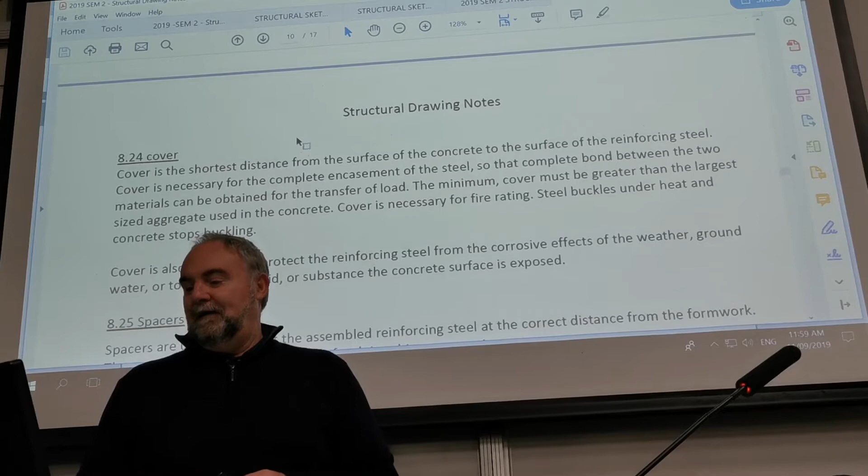Spacers, I mentioned spacers before, and there's a question on them and bar chairs. Bar chairs are strange things - they sit like this, and they hold the reinforcing bars up, basically. You have a series of those chairs all the way along the job at the right height. They're adjustable, made of plastic, and they're left in the concrete. The main idea is to keep the bars from bending in the longitudinal direction and keep them at the right height.

Pouring concrete is another thing to consider, and another good note for this job. We're coming in from gate 4, and we'll have to go across grass. If you were doing it at this time of year, you'd probably dig the grass up completely, so it's not really a good idea to take the concrete truck there - they're very heavy, with 6 metres of concrete in them. So it's not a good idea to take that truck all the way to the site we've got.

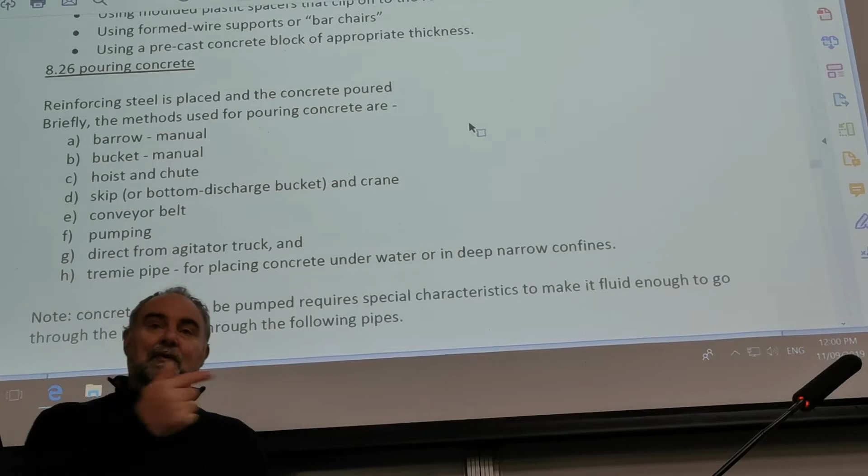So I'd suggest it probably wouldn't be directly from the truck. You'd probably use a hoist and a chute, and either manually take it by barrow, or use some form of conveyor belt or pumping. My best guess is pumping - they have very long pipes that can pump the concrete to the site. The guy just holds the pipe there, spraying it all over the concrete slab, and at the other end they've got a machine pumping it from the truck. He'll put his hand up when that's enough, and they'll drop it off.

One thing that's really important when it comes to concrete is, as an engineer, to get very close to the right amount. That's why I'm making you do quantities.

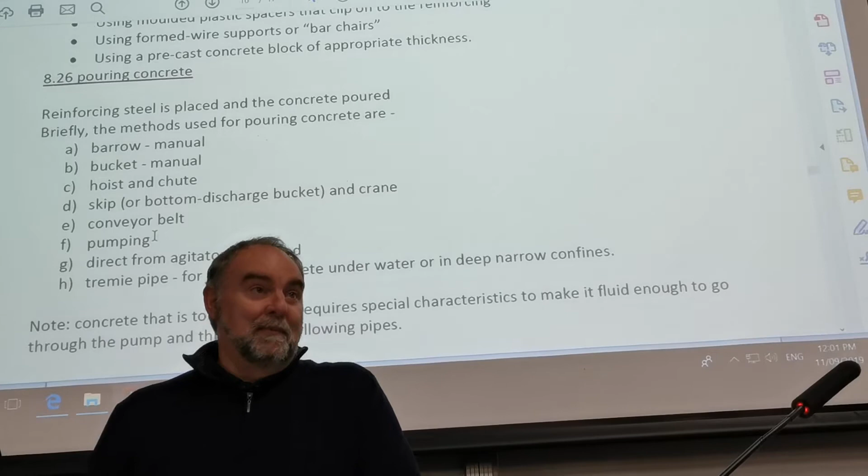If you don't have enough concrete, well, obviously you've got a big problem. Somehow within about half an hour you've got to get some more concrete there, because you've got a bit missing to fill up. That's a huge no-no, because it's setting. Once it's starting to set, and once it's set, you're left with a big problem.

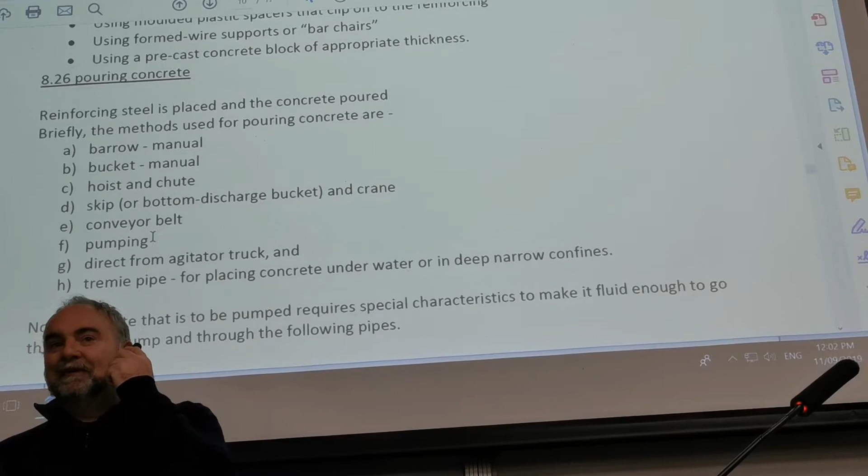So you tend to over-order. But if you over-order too much, you end up with concrete back in the truck, and they charge you to get rid of that. So you're not only getting charged for the concrete, you're getting charged for them to take it and put it somewhere. Their bosses don't care where they put it, so they've probably got someone down the road who says, hey mate, I need some concrete, can you give it to me for such and such a price? So they charge you to dump it, and then they give it to their mate for some money in the back pocket.

So from an engineering point of view, either have somewhere up your sleeve you can put it on site, I don't know, a path or something extra, or don't order too much.

That's why, when you see concrete being poured on driveways, there's always a neighbour running over with his barrow asking if you've got any extra concrete. Because there always is, and he can pick up some for free. Good tip too, if you're the neighbour. That always happens, because he knows he's saving the guy money, and you see the guy in the truck go, another neighbour pinching my profits.

Compaction - Ingrid would have already taught you about compaction and how they compact the concrete so there's no voids in it, and how they leave a nice smooth finish on it.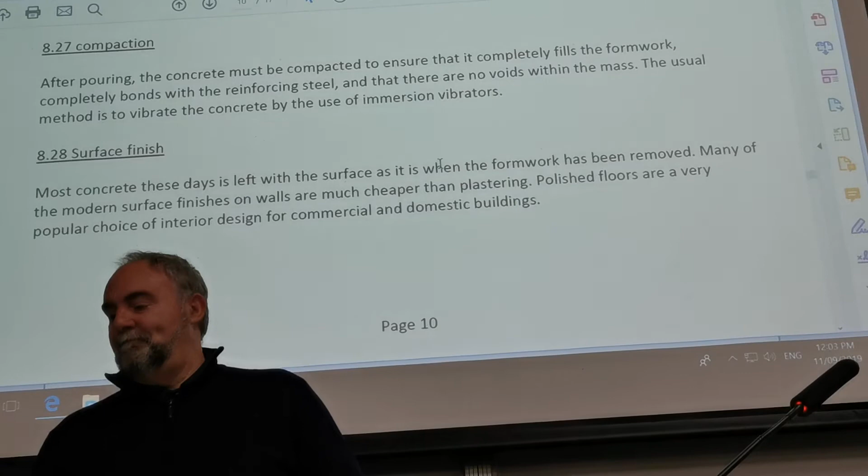Particularly polished floor finishes for commercial buildings, etc. Very expensive polished floors in Auckland. It's cheaper up north for some reason, I'm not sure why.

Okay, I was talking about cover. Your job has a minimum cover on it, and in the lab today we'll talk about the minimum cover. The cover is the distance from the edge to the start of the reinforcing bar, not the middle, so you're going to have to take off half a bar diameter.

Cover is, yeah, we're back to my favourite person in the office, the geotechnical engineer, in some ways. The cover is determined by the material that's in the ground. So if it's geothermal, it's going to have more effect on that steel, so you'll need more cover.

If it's near salt water, you're going to need more cover. And just ordinary wet, damp Auckland ground, which you get at this time of year, you will need a bit more cover too. If it's just air, it's usually okay for the standard cover, but if it's air near salt water, it's still going to have an element of salt in it.

So that cover is predetermined by the engineer. Usually they look up tables, or they'll talk to the geotechnical engineer to find out what the ground material's like. If it's got salts in it, it also can affect it.

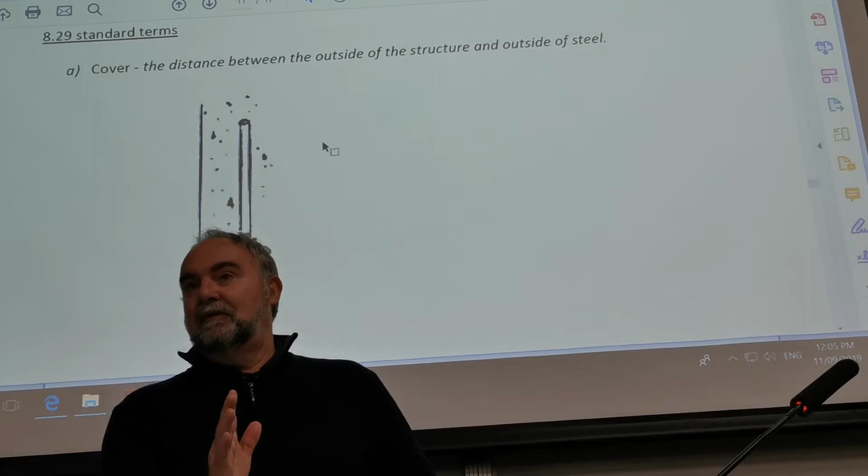So when you're designing reinforcing, that cover becomes very important, because if you put any bars too close, it's going to rust. If it rusts, the building's going to fall over. Okay?

There's some explanations of stirrups and hooks. They tend to be smaller bars that hold the main bars in. Before, there was a picture of that column where all the guys were working on it - the stirrups were the bars going around like that.

Lap and splice, we've covered that. There's the 32 diameter I talked about before, and that's your lap distance on the bars. They are pushed against each other, and I'd like you to draw them like that when the time comes.

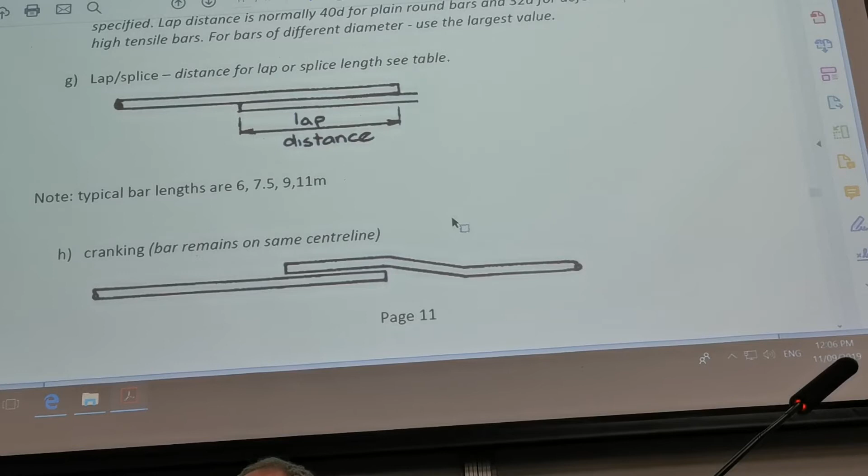Cranking, I know there's a picture here, and I've only really put this here for information. Generally speaking, we don't do that anymore in New Zealand. It is an option, and if you get into a tight situation you can do it, but generally speaking we lap it sideways like above. This is the one we tend to use.

Can you explain one more time how we figure out that distance? The distance from that point to that point is equal to 32 times the diameter.

We generally use deformed bars in New Zealand. However, if there is a table, which your assignment has got, and I showed you, use that number. Sometimes they're the same, but the table always dominates.

This is a little table of how you might calculate the costs for pouring concrete. I have done this before in the past. Your assignment doesn't have this, so you're fine. The fourth year students have got to calculate the costings for the job, so they're going to have to take a lot of this into account.

We're going to finish today's lecture on this drawing here. So in this particular case, this is a plan view, a bit like what you're doing up here - a plan view of the slab. Let me make this very clear: in assignment 3, you don't have to draw any of that structure. It's just the slab with the reinforcing in it.

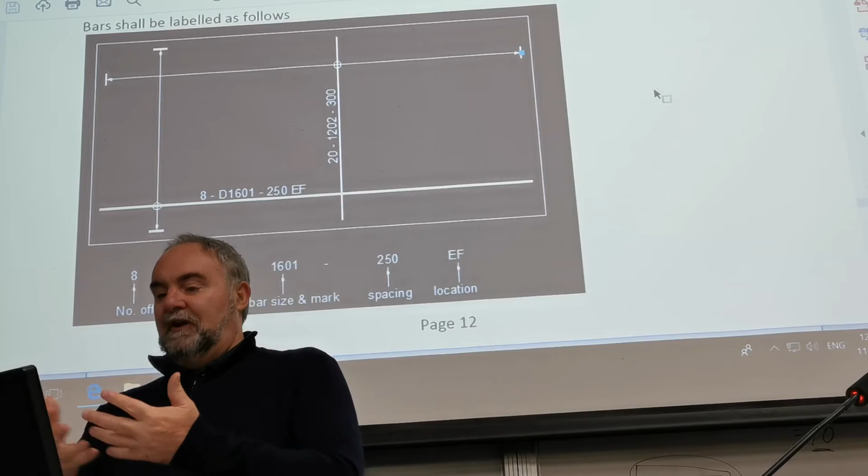This here is a plan view of a very, very simple slab. It's not like that one, it's just a rectangle with a depth. It's got two lots of reinforcing, one going in that direction and one going in that direction. And this is how we draw it. So this is your little introduction before we go to the labs this evening.

So we draw that bar there. The exact width of the bar is 16 millimetres. How do I know that? D16 - what do you think the D stands for? Deformed. Don't make that mistake, not diameter. Then there's 01 - any idea what the 01 stands for? We'll leave that.

It was sort of explained because the next one's 02. If you have a look at the bar running vertically, that bar is called 1202. There's no D in front of it, so it's not deformed, it's a plain bar. The 12 is the diameter of the bar, and the 02 is sort of the mark. Let me explain the mark - it's not like Antonio Banderas or whatever his name is in that movie where he was 'the Mark'. A mark is what we call each bar.

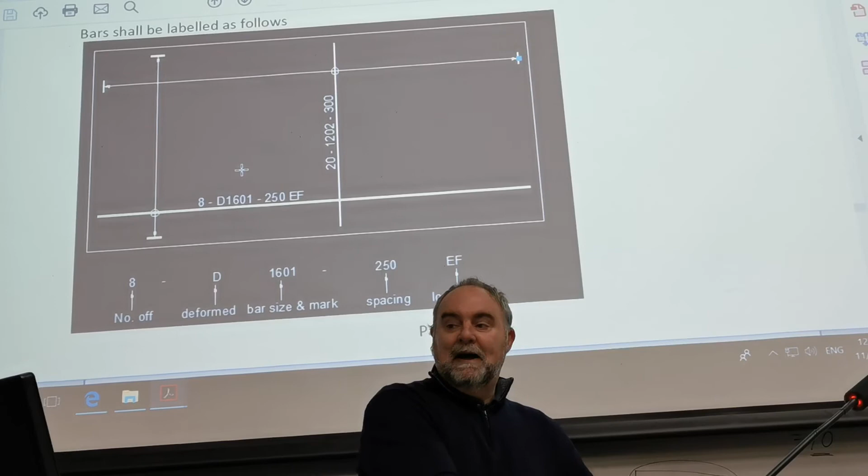So in this case we have a 16 millimetre diameter bar, this one, and we call that 01 - our first mark, our first bar. The next one is 1202, that's the next bar mark. The next one, if we had another one, might be, I don't know, 1603 - that would be the next bar mark. So it sort of is the mark, but it's sequential. Your assignment's got 5 bar marks, I'll show you that in a second, and an example of what you should be doing for your assignment.

So one is laying like this, another one laying like that. Yep, we'll get there, just hold on. What are the arrows for? Yeah, just hold on. Very exciting, isn't it - not for me, but for you guys.

250 - any idea what the 250 stands for? Height of... someone said it over here. Space? No, it's the spaces between the bars. So this bar is drawn along here, and the next one will be 250 away, then 250, then 250, then 250, right? And that one is going to be 300.

The arrows, another good question. This bar here's got a little circle on it, so by my reckoning that must be tied up with that arrow, right? And the arrow points down to that. Now that is called a delimitator - not a terminator, delimitator, but like a terminator because that's where it terminates. There's one here and one up the top. So that tells me that bar is 16 millimetre diameter, it starts here, which looks very close to the cover, and ends up the top. There are 8 of them.

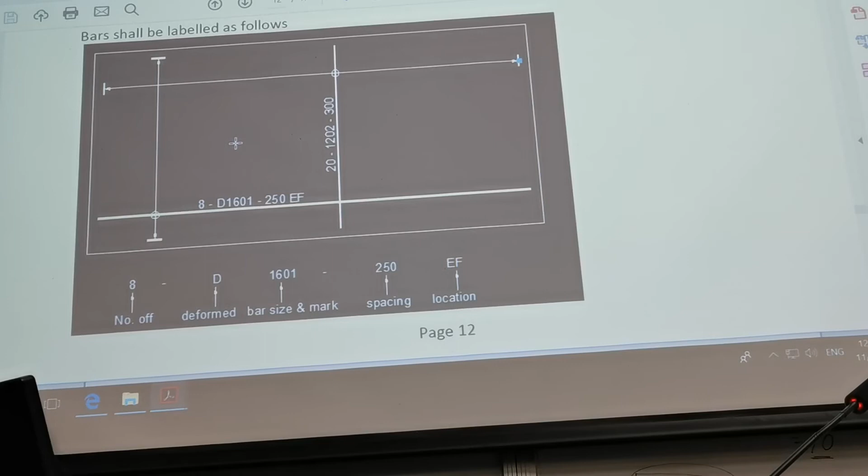And they're at 250 spacings. Now the next thing you're going to say to me is, what if it doesn't go 250, 250 and then a little bit at the end? No - when you are calculating and drawing it, you work out the exact spacing, so it might be 246.3 or something like that, okay?

So we must get... we used to in the old days draw the whole lot, but this is the new way of doing it, like this. Saves a lot of time.

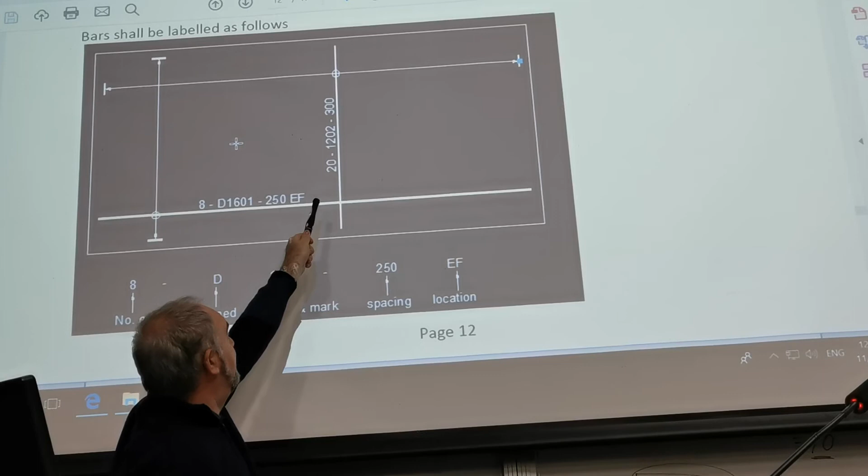Now this bar goes from that point to that point, delimitator to delimitator. If you want to know what size to draw this in the assignment, it's roughly 2 times the diameter of the bar. You can see this bar's a lot thinner because it's a 12 millimetre bar, and it goes from there to there. There's 20 of them, and the reason why there's 20 is that there are 300 spaces, and there's 20 of them from there to there. Probably doesn't look proportionally right, but that's what there is.

That is pretty much it in a nutshell, except for this terminology here, which is the tricky part for this and for your assignment. We can have each face, near face, far face, top, bottom, top and bottom, each way, both ways, and all ways. They're all abbreviations for the bars.

Will we be given load on a slab? Will you what? Will you be given maximum load on a slab? No, you'll be given... if you have a look at your sketch...

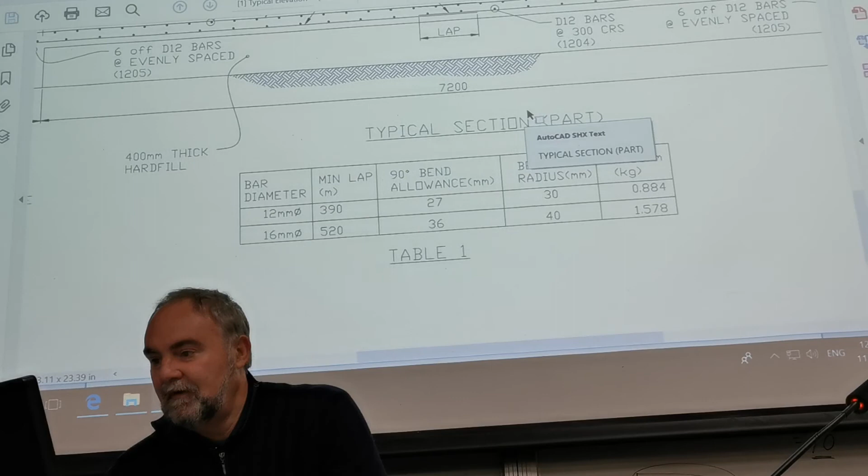Let's do sketch 1. Let's go backwards, let's zoom in here. You can see here on this sketch that at this end there are 6 bars: 1, 2, 3, 4, 5, 6.

They are D12 bars, and they're evenly spaced. The ones running in that direction, on the bottom, are D12s at 300 centres, and the ones on the top look like - I can't quite see it because it's slightly out of view -

D12s at 200 centres. When it says they're deformed, does that mean they're actually physically deformed in shape? Sort of, I covered that before in the notes. It's all right, it's fine. They're not handicapped anyway.

So these top bars are D16s at 200 centres, and these bars here are D16s at 300 centres.

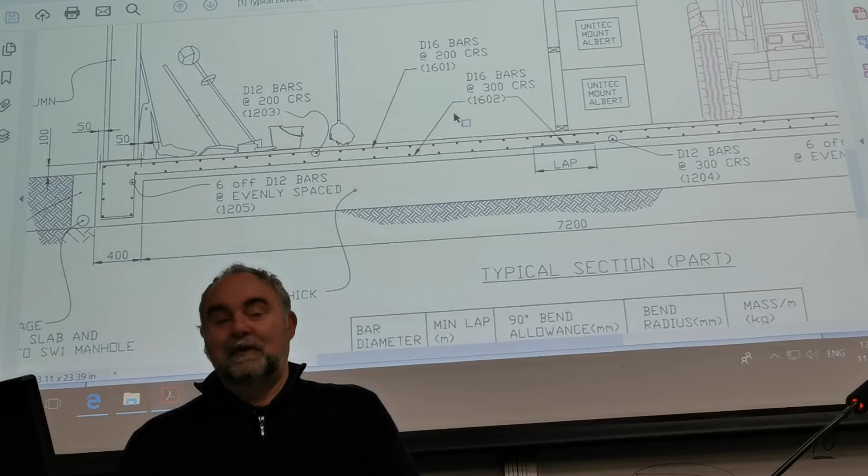Now, when I said it's a game of Tetris, there are rules for these. Those lines coming down there cannot go through any of this text. They are allowed to go through any of those dashes. And same with that line there.

Now the equivalent of what you've got to draw in that slab - you have bars on top and bars below, and you've got overlapping bars. You've got 8 lots of text to put on there in one direction, and I think 6 lots of text in the other direction, and you're not allowed any of those lines to clash with your text. So it becomes a game of Tetris to try to jiggle it around to get it in.

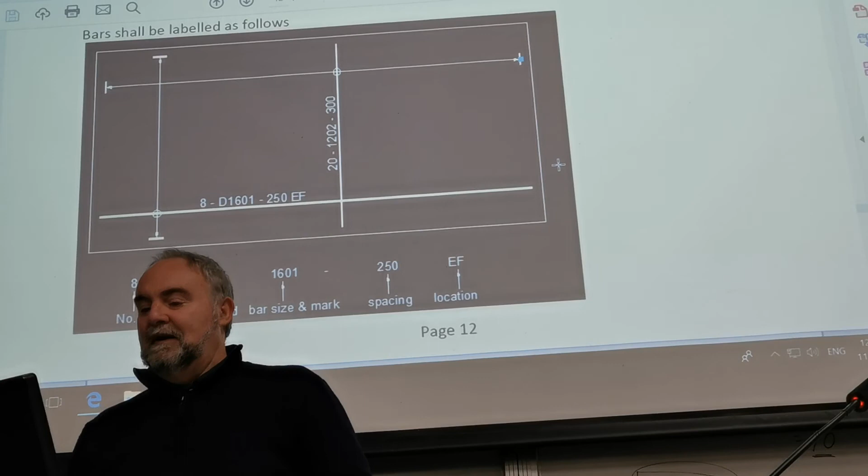Okay, so that's why I'm saying don't start this on Sunday beforehand, and just a little warning. So in today's lab, we're going to go over an example, and we may look a little bit closer at this.

So you can leave here like half stunned mullets, and after your lecture I will stun you a little bit more, because we're going to work our way through a retaining wall example. Right. Look at that, finished 10 minutes early.

Can you please explain in 10 minutes - I'm going to talk about last time - how could we take into account that compaction factor in our volume? No, not the concrete. No, but I'm talking about last assignment, in the past - Assignment 2, how could we take into account that compaction factor in our volume?